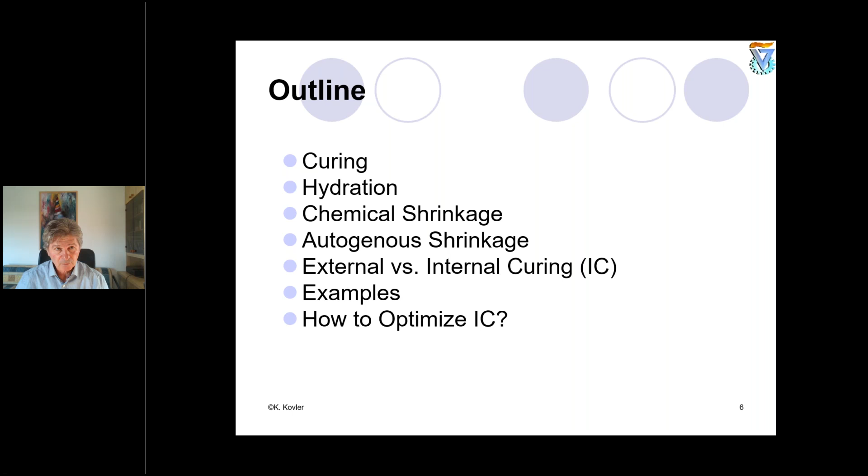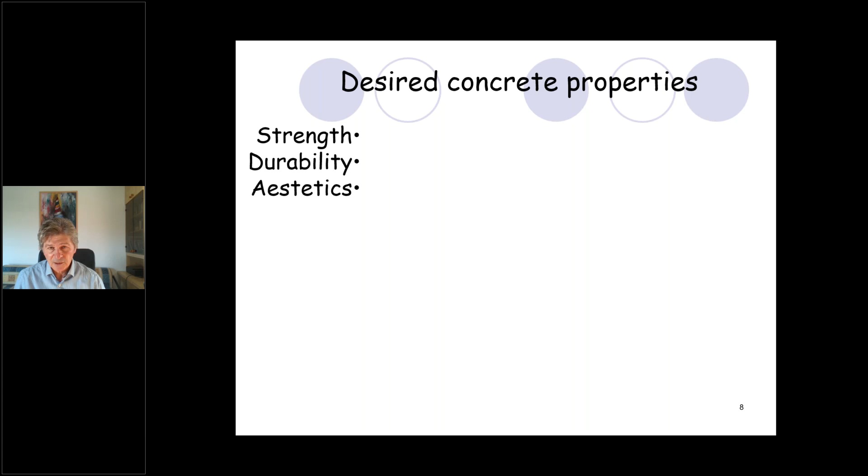What are they? We are speaking about strength, durability, and beauty, aesthetics. You see, this is a kind of strength, durability, and finally beauty, aesthetics. So concrete structures, especially if they are exposed, not plastered, not coated, should look nice.

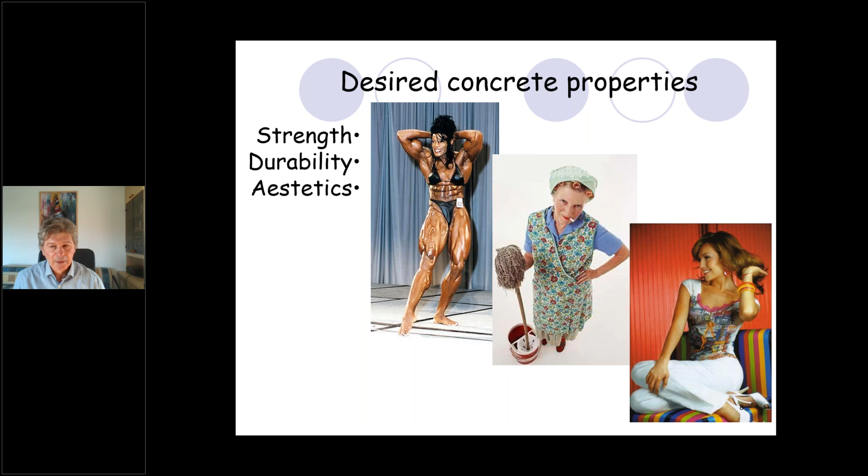In Israel, in our National Institute of Standards, we have been trying in the last 20 years to adopt as much as possible Eurocode and the European standards. I'm just citing from Eurocode about curing: concrete shall be cured and protected to minimize shrinkage, mainly plastic shrinkage in the very beginning, to ensure adequate surface strength, adequate surface zone durability - again strength, durability - and to protect from harmful weather conditions, from freezing, which is not very relevant I believe for most areas in India, and Israel is also considered a hot country.

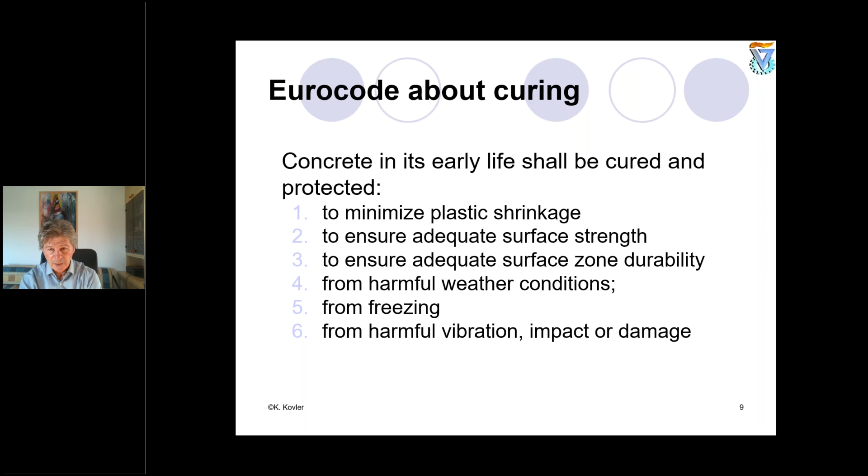But in principle, we build concrete structures in many countries with half a year or maybe even more of winter. So there is a need to protect from freezing, from harmful vibration, impact, or any other damage.

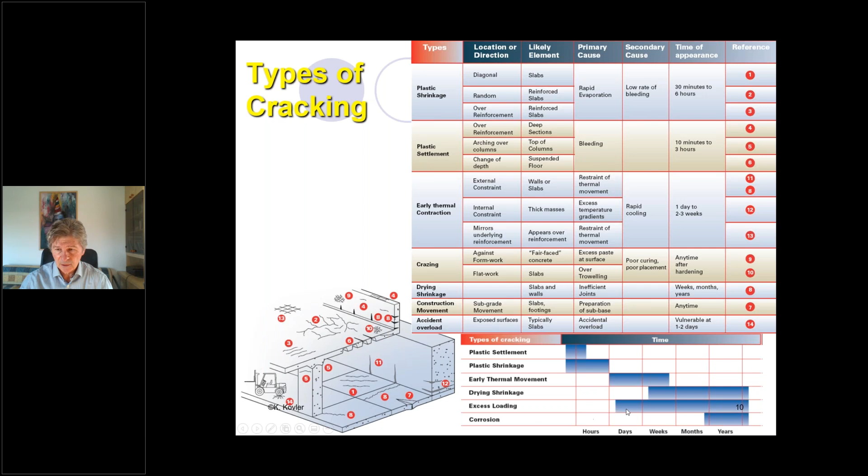Excess loading and corrosion. There is a need to plan and execute curing. It's not something easy to do. We need to understand there are different standards, make some calculations, and design properly. So this is a real science in our area.

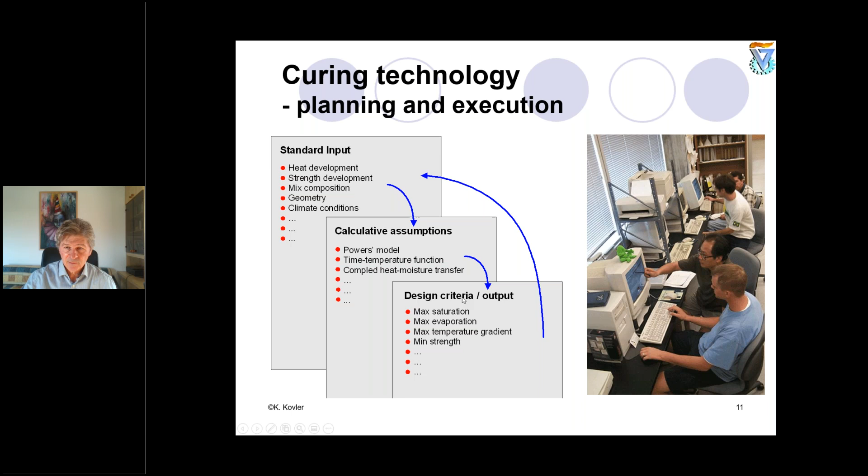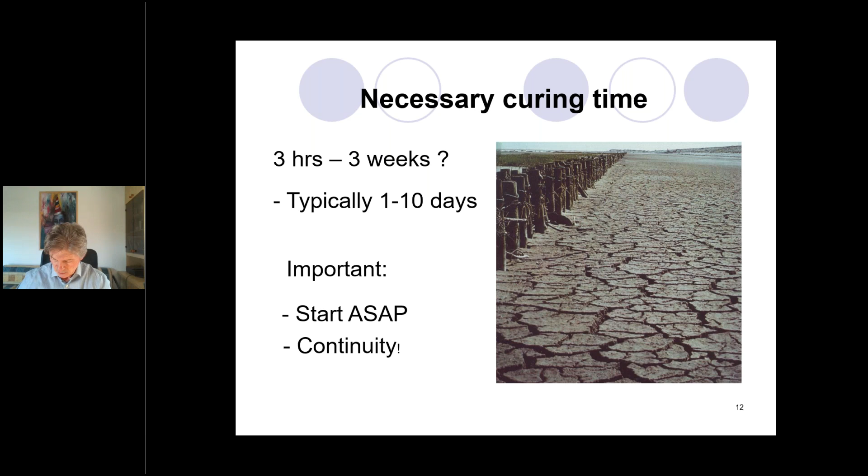Let's start speaking about the details. What is the necessary curing time? Usually we are speaking about hours, days, and weeks. The answer in our standards is simple: typically the standards discuss 1 to 10 days curing time. And what is very important to emphasize is we need to start curing as soon as possible. Another very important word is continuous curing - trying not to have any breaks, any pauses in curing, continuously curing.

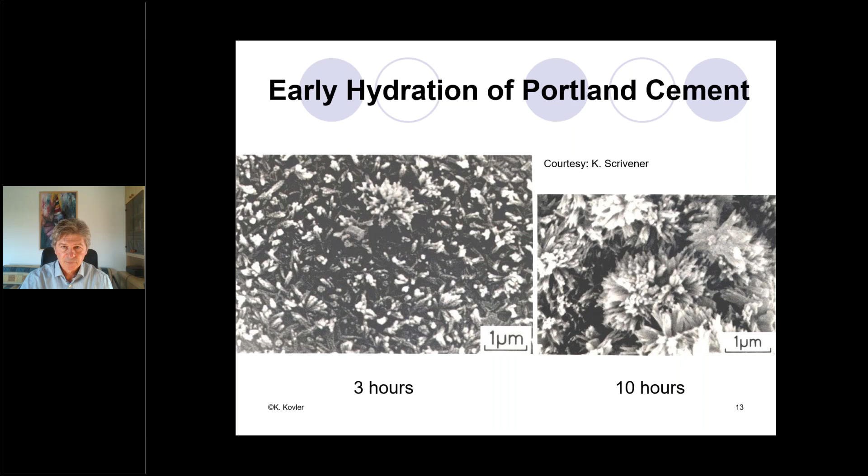Very often they are noted as CSH, calcium silicate hydrates. This calcium silicate hydrate phase is the decisive phase for strength. It's a strength-bearing phase, but it doesn't form very early, so it needs some time.

The first period is called the dormant period, when nothing has happened. This is because of the need to regulate the setting times to provide a possibility to work with fresh concrete - transportation, casting, vibrating, finishing, all kinds of technological operations with very fresh concrete. Strength starts growing a few hours after the so-called setting time. I don't want to go into details now - we have different setting times, initial set and final set, but in principle we are speaking about hours and then days.

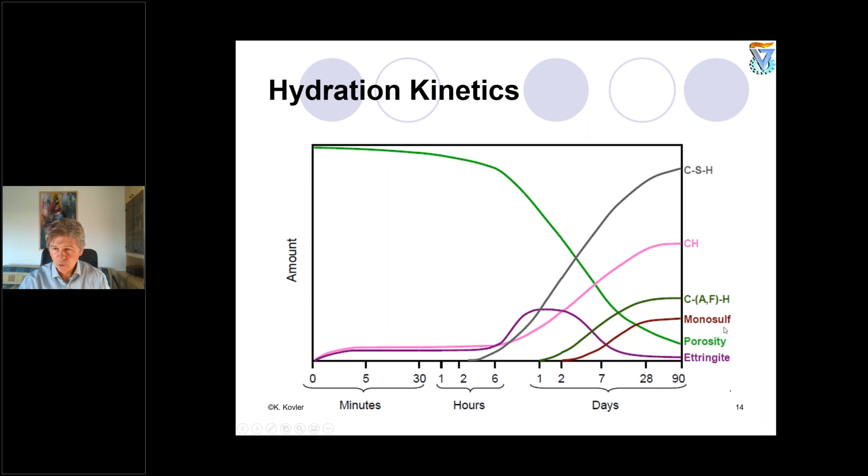Different phases are formed in parallel to the main strength-bearing phase CSH: calcium hydroxide, which is responsible for alkalinity, which is a nice thing from the point of view of protecting the steel reinforcement from corrosion. We have other phases too - monosulfate, ettringite, and many others.

Heat of hydration can be effectively used to map the progress of hydration. We distinguish between five phases: initial dissolution of solids, induction period, acceleration, deceleration, and steady state. This is illustrated in the next slide.

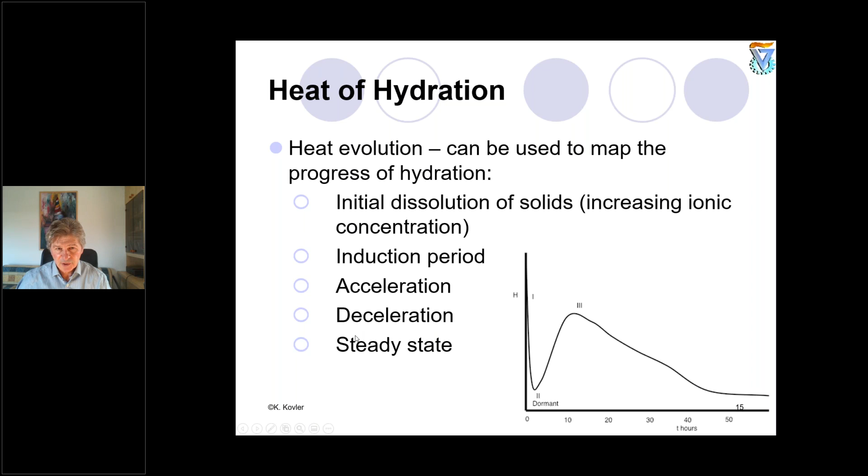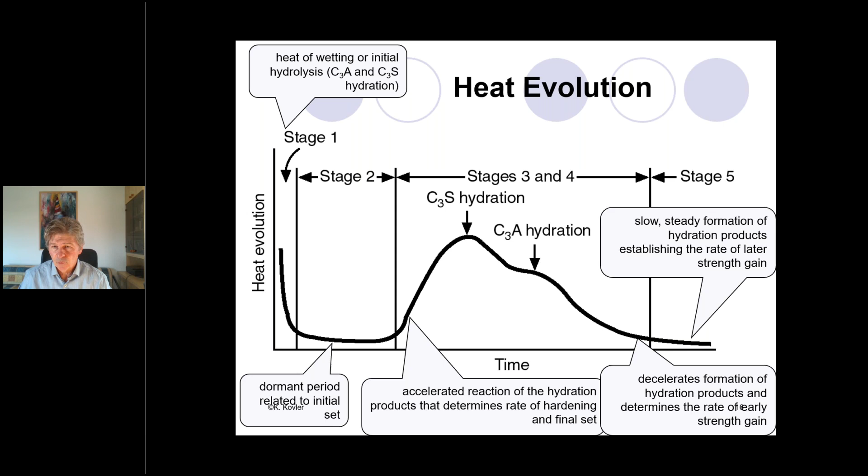In the beginning, stage 1, we have a little bit higher heat than in the following stages, because of dissolution or initial hydrolysis. Then stage 2 is a dormant period related to initial set. Stages 3 and 4 indicate the C3S, meaning alite hydration, the main mineral usually in Portland cement, and C3A also. Deceleration is when formation of hydration products is decelerating, and this phase determines the rate of early strength gain. Then slowly the hydration products are formed and the strength increases.

Different minerals: alite, C3S, belite, C2S, tetracalcium aluminoferrite, which is celite or ferrite, and the only mineral which doesn't have an abbreviated name, C3A, tricalcium aluminate. All of them have different kinetics of hydration.

When we speak about hydration, we understand that cement hydration, like hydration of many other mineral binders, also gypsum and lime-based systems, is exothermic with liberation of heat. Concrete is an insulator, and heat of hydration can be either detrimental, for example when we have thermal gradients, especially important for mass concrete structures, resulting in cracking, but also helpful, especially in winter time, in cold regions, which provides activation energy when concrete is in cold weather, resulting in early strength.

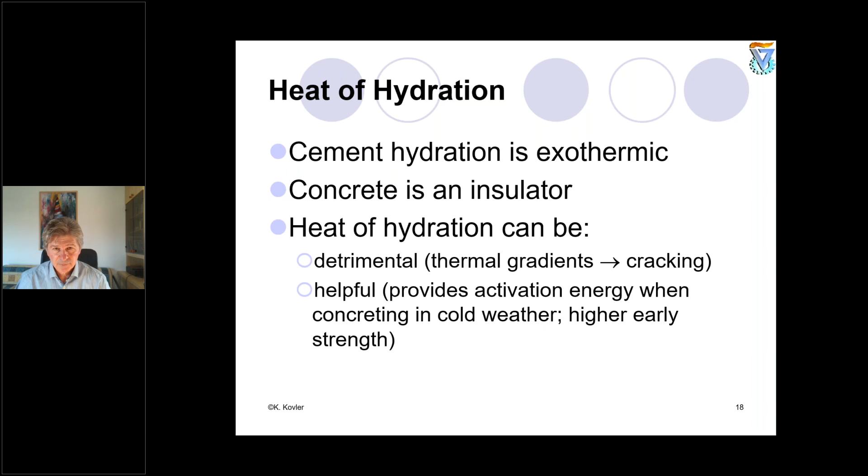You can see this diagram, I took it from one of the teaching books, I think it was Mindess and Young. You can see there is a kind of optimum, and the optimum temperature is between 10 and 20 degrees. I know that in India you have in many places higher than 20 degrees, but it's okay up to 30, just not very, very high.

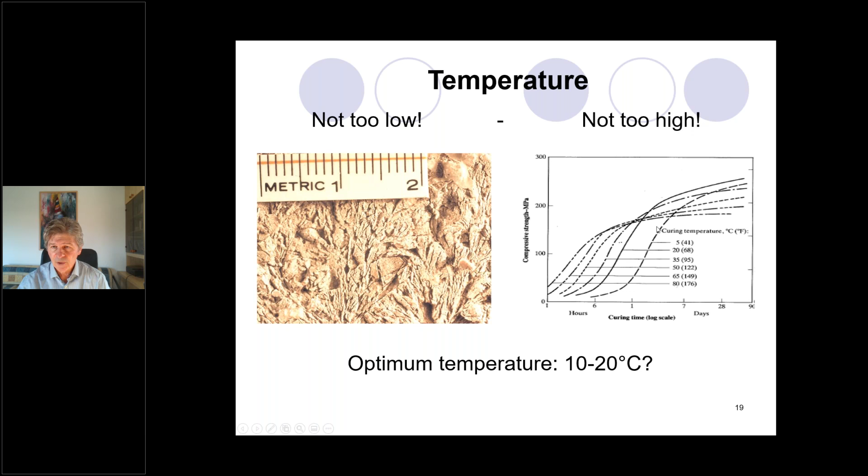I would like to remind you of the popular concept of maturity. We have different formulas illustrating maturity. The most popular, I think, in the literature, teaching books, and standards, is this formula where temperature is corrected by 10 degrees centigrade, but this is a kind of empirical correction.

This is a curve which is very familiar for all concrete technologists, illustrating the dependence of strength versus maturity. It doesn't matter what kind of temperature was implemented during curing, all the points lie on the same curve, which is very useful to predict, for example, when we need to demould structures, or when we can release the stresses from the reinforcement or cables, for example in pre-stressed concrete. So there is a very important meaning of this maturity curve.

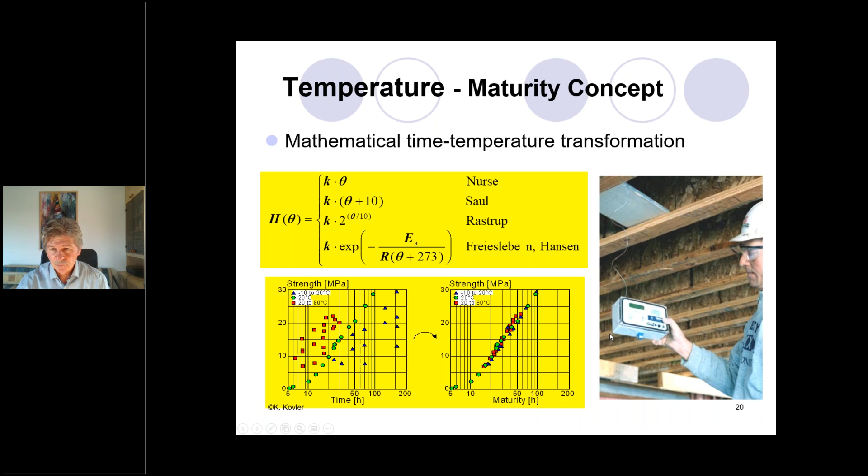Different companies, I don't want to advertise for any specific company, but many companies produce this kind of instrument indicating the maturity immediately. Most of my presentation is now devoted to moisture.

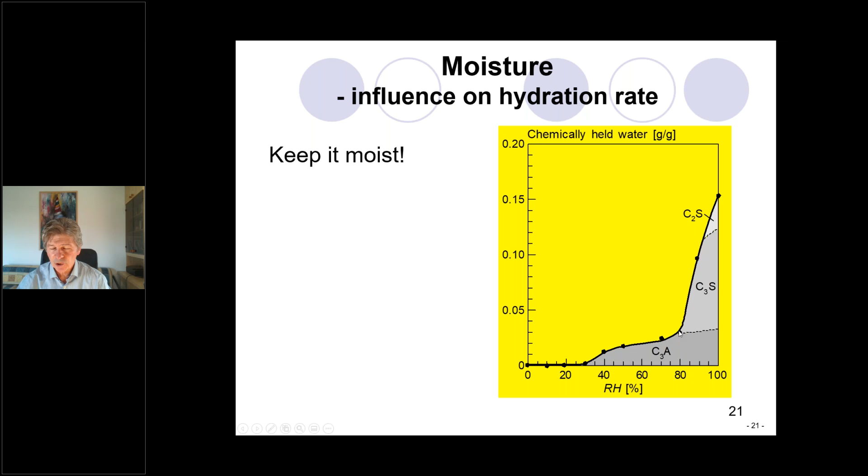We know well that we need to keep concrete moist. Keep it moist, this is a rule. The different phases I spoke about before, C3A, C3S mainly, and C2S, need sufficiently high relative humidity to hydrate. In very dry climates, in very low relative humidity ranges, we can neglect the formation of the hydrates because there is no chemically held water, nothing.

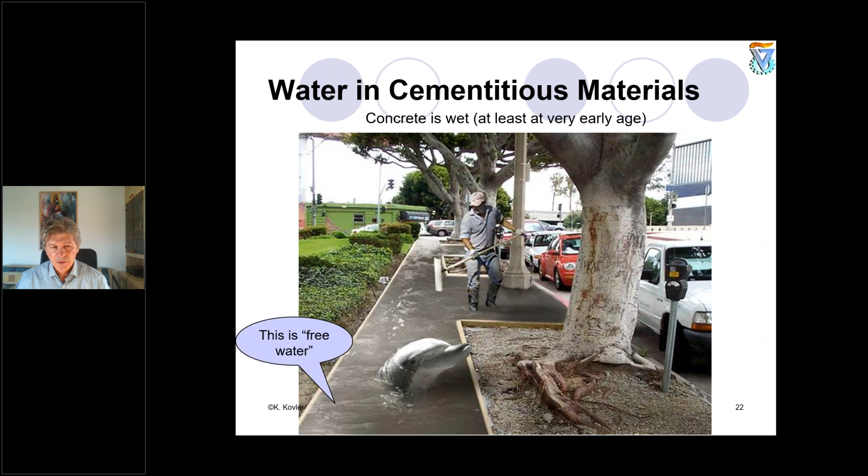Water is a very important component, as we all know, in concrete structures and compositions. Of course, concrete is wet, at least at very early time, so we have extra water. In many cases, not all this water is needed for hydration, so we have too much water, and this water will eventually evaporate. This is so-called free water. Free water, just to remind you, is mixing water that has not reacted with the cement phases. It's not a part of the structure, not a part of these phases.

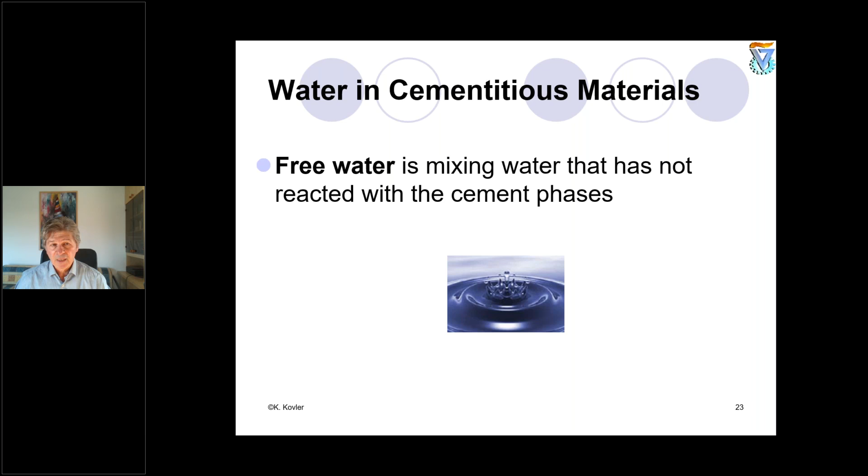In addition to free water, often called capillary water, located in capillary pores, we have physically adsorbed water. I'm just following the model of Sereda: physically adsorbed water and interlayer water. So we have different kinds of water: free water and physically adsorbed water, including interlayer water.

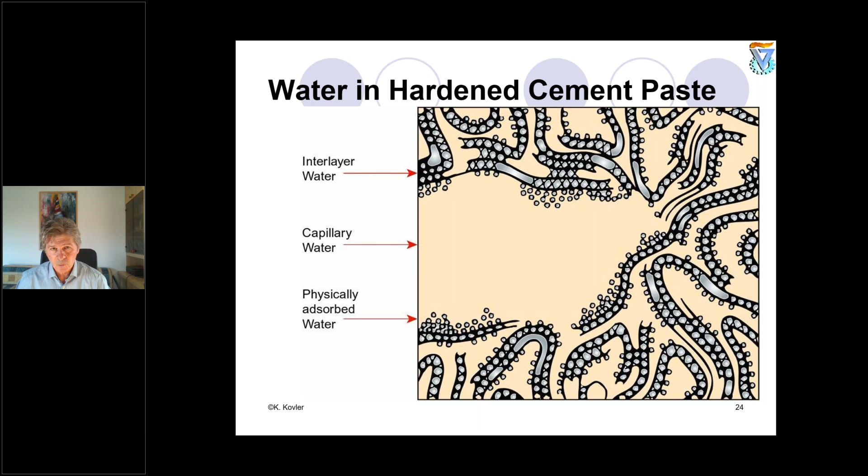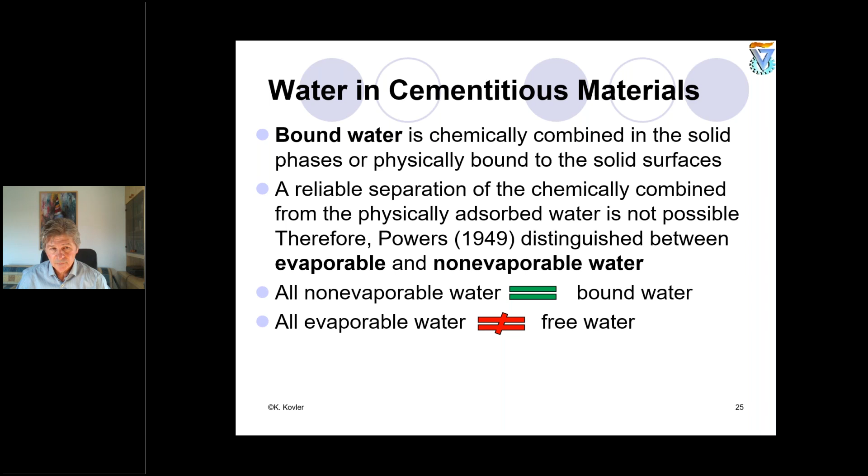Bound water, or chemically bound water, is chemically combined in the solid or physically bound to the solid surfaces. A reliable separation of chemically combined from physically adsorbed water is not possible, unfortunately. Therefore, Powers in '49 distinguished between evaporable and non-evaporable water. All non-evaporable water is considered bound water, and all evaporable water is not necessarily free water. This is just reminding you of the basics from the classic work of Powers.

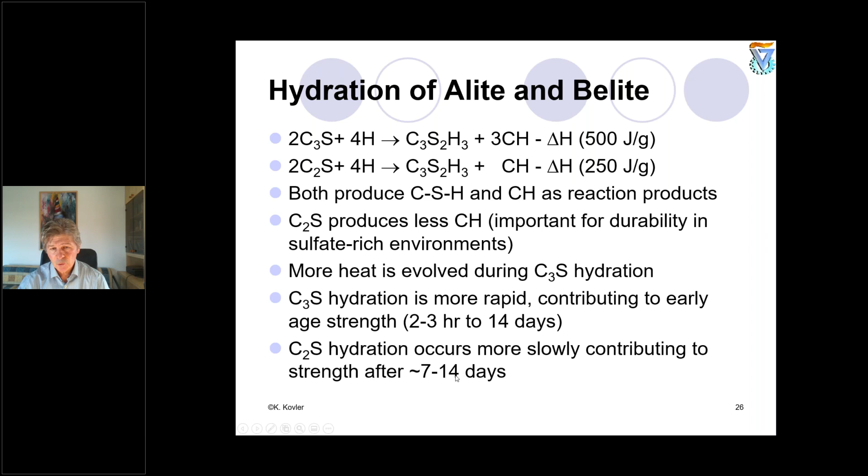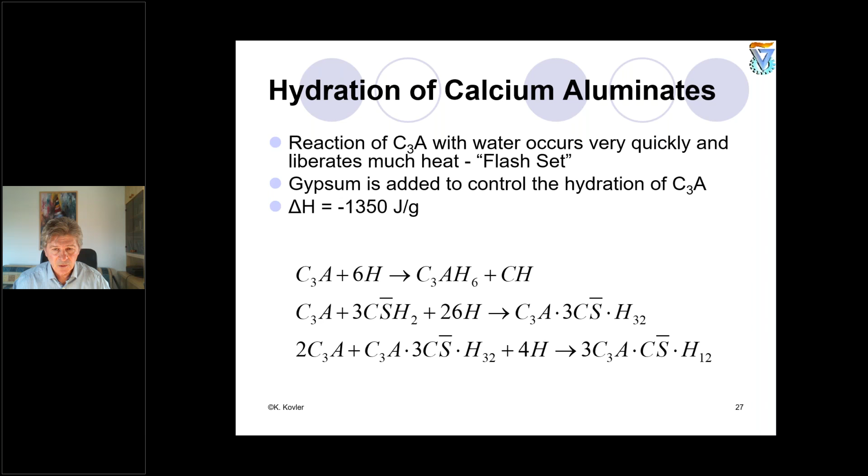Non-evaporable water, if we calculate it using stoichiometric calculations, is different for different hydrates. But in principle, coming to the weighted average of the non-evaporable or combined water content, we're speaking about a water-to-cement ratio of just 0.23, 0.24 for this bound water. This is the part of water relative to cement needed to form hydrates. But unfortunately, or maybe fortunately - we'll discuss it later - this very low water-cement ratio is not enough to make complete hydration of Portland cement.

We need to take care of the physics of porosity, because if there is no room to accommodate the expansion of the newly hydrated products like CSH, the reaction will stop. For having the total minimum water-cement ratio needed to complete the reaction of Portland cement with water, we are coming to approximately 0.4, which is much higher than the chemically bound water-to-cement ratio.

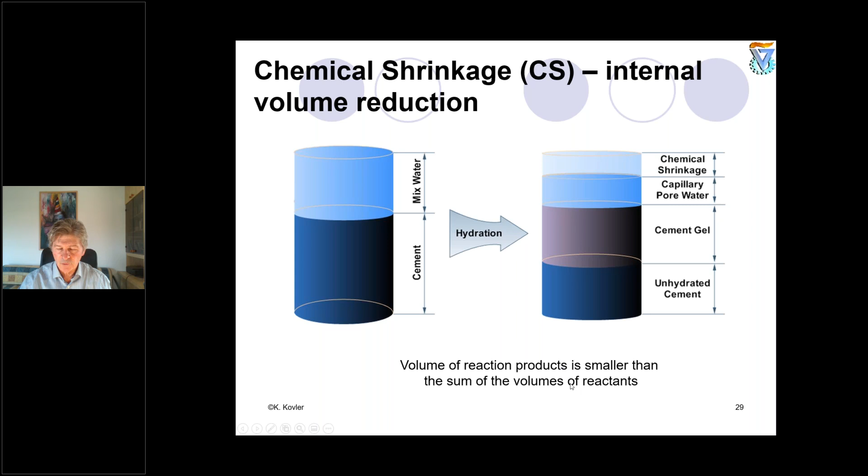The magnitude of this chemical shrinkage is relatively high. By Powers, in different works, we can read different numbers, but he spoke about 6, 7, 8%. So this is not per mil, not microstrains, which is used by structural engineers to design structures - it's several orders of magnitude higher. The volume of reaction products is known to be smaller than the sum of the volumes of reactants, and this is our chemical shrinkage.

The first researcher and engineer, by the way he was in parallel a brilliant researcher and brilliant engineer, was Louis Le Chatelier, a French-Italian chemist. He came from a mixed family. Maybe the mixture of genes is responsible for the brilliant contribution of Louis Le Chatelier into different areas of cement and concrete science and engineering.

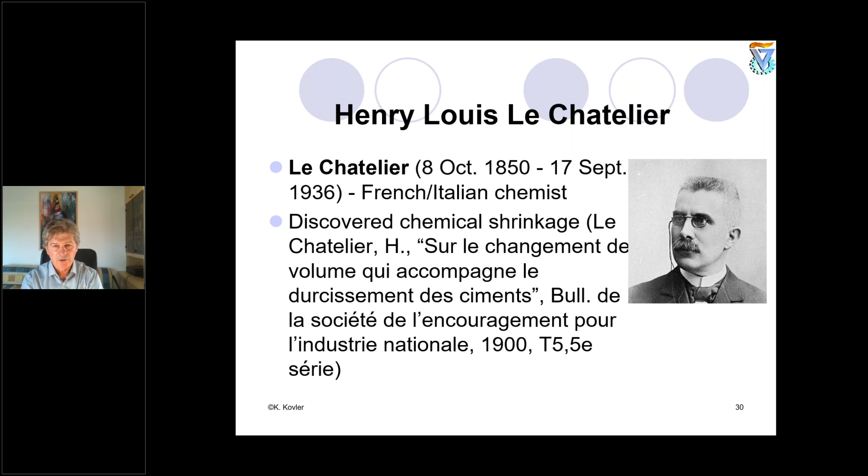He discovered this chemical shrinkage more than 120 years ago. In 1900, he published a famous work explaining what chemical shrinkage is.

What is the practical importance of chemical shrinkage? In concrete with very low water cement ratio, I'm speaking about high strength, high performance concrete, chemical shrinkage results in self-desiccation and autogenous shrinkage, which can lead to cracking and even failure.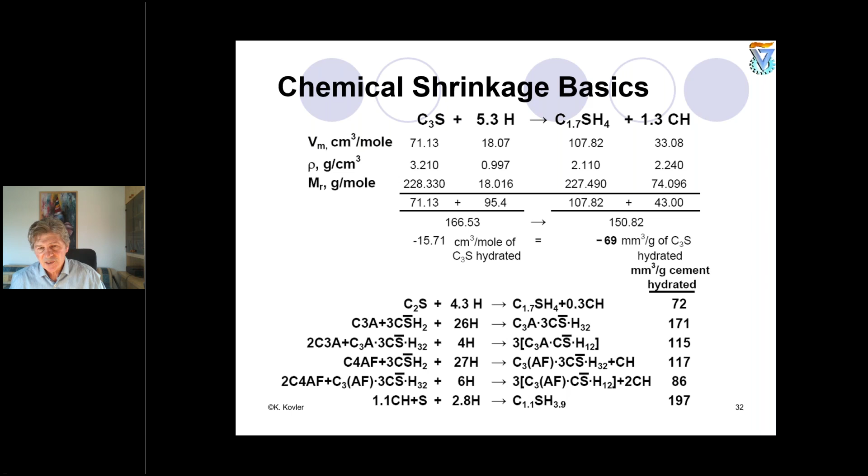I would like to explain briefly how Le Chatelier measured this chemical shrinkage in his experiments, and how we can measure it now. This is a very simple test he did. He took a flask, cast a very thin layer of cement paste in the bottom, filled it with water, and followed the drop of the meniscus in this very thin tube.

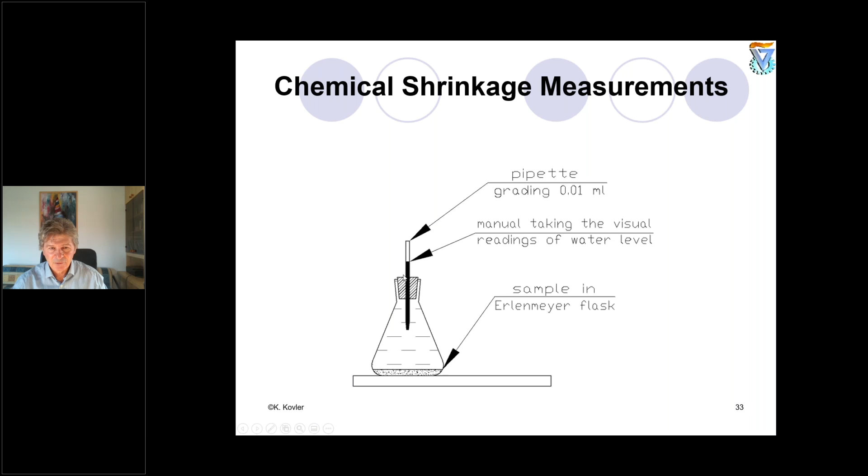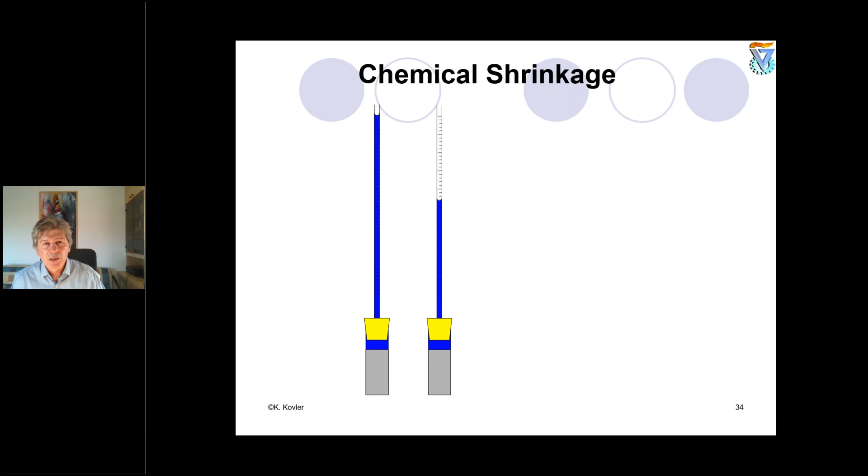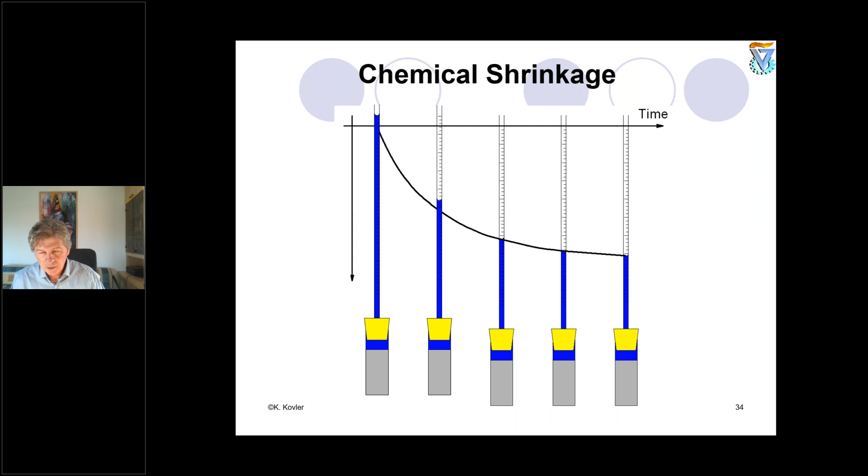From following the meniscus drop, he understood that some water was disappearing. It didn't evaporate, because these conditions were not characteristic for evaporation. So where did the water go? He understood the water filled the internal pores forming in the system. So chemical shrinkage is a reduction of volume, an internal volume reduction. It is very difficult to see it from outside.

So we have another method of measuring chemical shrinkage, by weighing this flask with the sample inside water. This is a very simple test. We can do it with a very accurate balance, with accuracy of at least 1,000th of a gram. It would be nicer to have more accuracy, to have high accuracy.

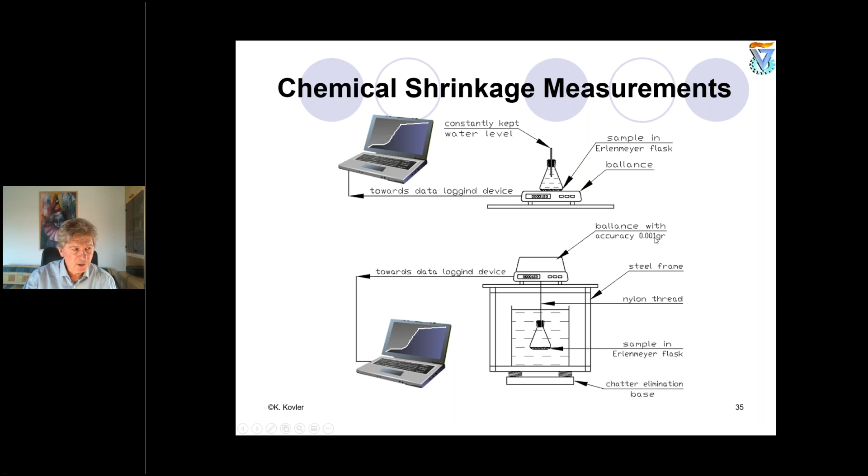This chemical shrinkage is accompanied by autogenous shrinkage and self-desiccation. Self-desiccation is a direct result of chemical shrinkage. This diagram was taken from one of the works of Professor Jensen from Denmark. You can see addition of silica fume increases the self-desiccation, and relative humidity in the system is dropping.

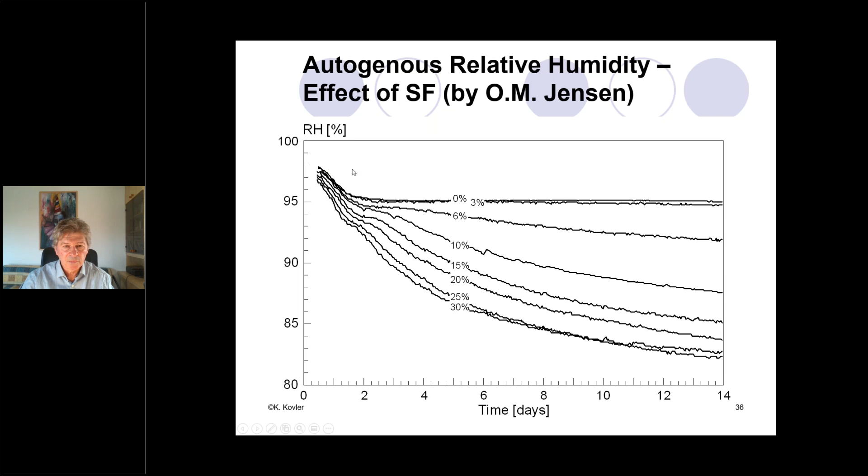What is the difference between chemical and autogenous shrinkage? I would like to say a few words about the difference. So again, chemical shrinkage is inside the system - you can see these newly formed pores shown in white. Autogenous shrinkage is a shrinkage which can be registered from outside. Of course, the magnitudes are completely different.

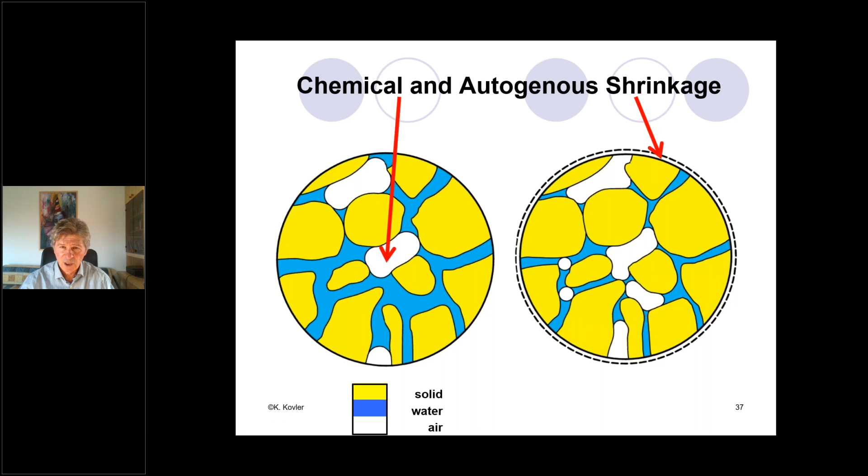You will see later on the typical results of measuring autogenous shrinkage. Then, how do we measure this volume reduction? This volume reduction is measured by using a so-called condom test.

Yes, this is a very popular test in the labs. We have to fill this condom with cement paste, for example. Or, by the way, there are big condoms - I'm serious, which are used for horses, for example. Yes, I saw these condoms in the labs for measuring volume changes in concrete or mortar specimens.

So this specimen, located in the membrane which is a condom, is immersed in water. By the way, instead of water, we recommend using a more viscous liquid like oil or paraffin oil, which is less penetrating.

Now a few words about different components of shrinkage. So till now, I spoke about autogenous shrinkage, which is a result of chemical shrinkage, but all these shrinkage components are measured from outside - this is external volume or linear reduction. Autogenous shrinkage is a very important component, mainly in high strength concrete, HSC.

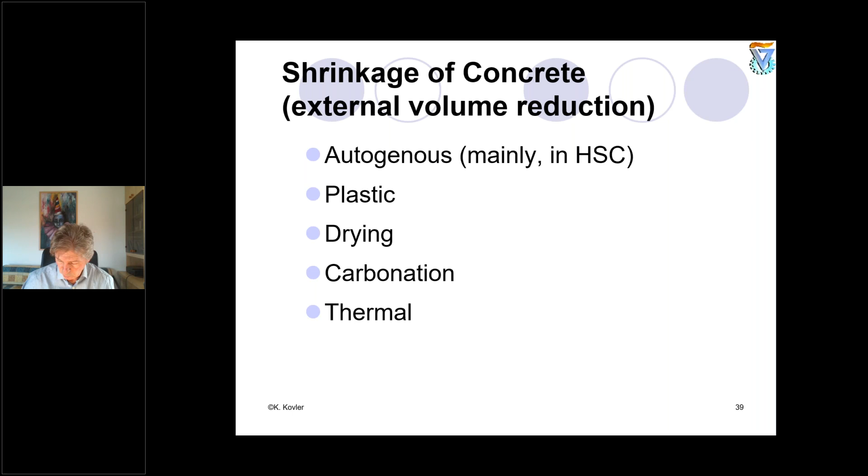Of course, we know well what plastic shrinkage is, what drying shrinkage is, what carbonation shrinkage is, observed in the very external layer of concrete, and thermal shrinkage, because most construction materials have different coefficients of thermal expansion. We cannot avoid thermal fluctuations in the ambient air, and concrete, by the way, during hydration can change temperature. So we have different temperatures - ambient air and concrete temperature - and we need to take care about these thermal components as well.

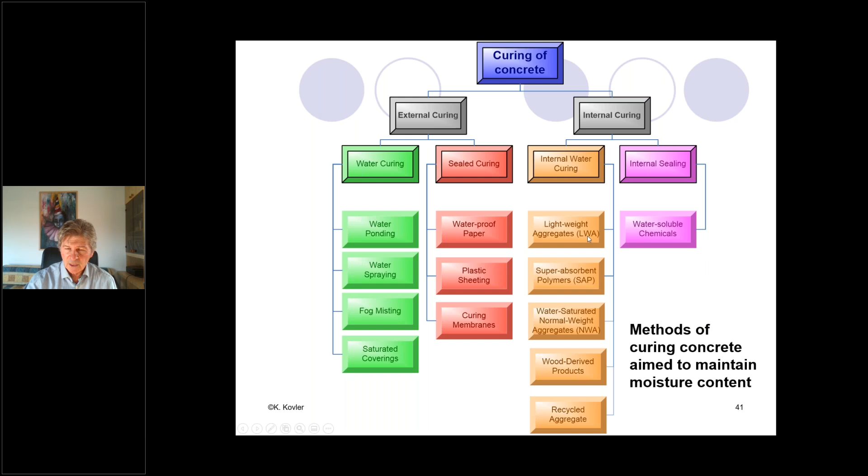Internal sealing methods are still on the research laboratory shelves. We have this method described in several papers, but it's still far away from being implemented in the industry. But these methods, especially lightweight aggregates and superabsorbent polymers—especially the first one—are already in practice.

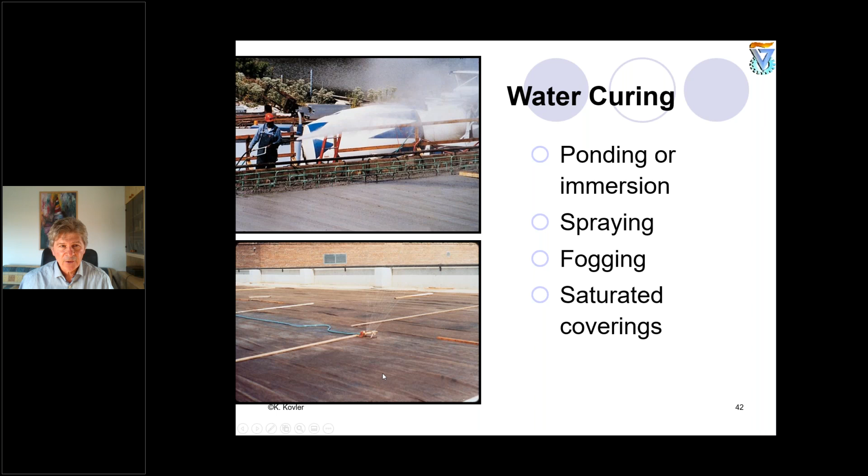Water curing, just to remind you: ponding, spraying, fogging, saturated coverings. All these technologies are conventional. They are very famous, very popular in the concrete industry. I'm going quickly because I have a large number of slides to go over.

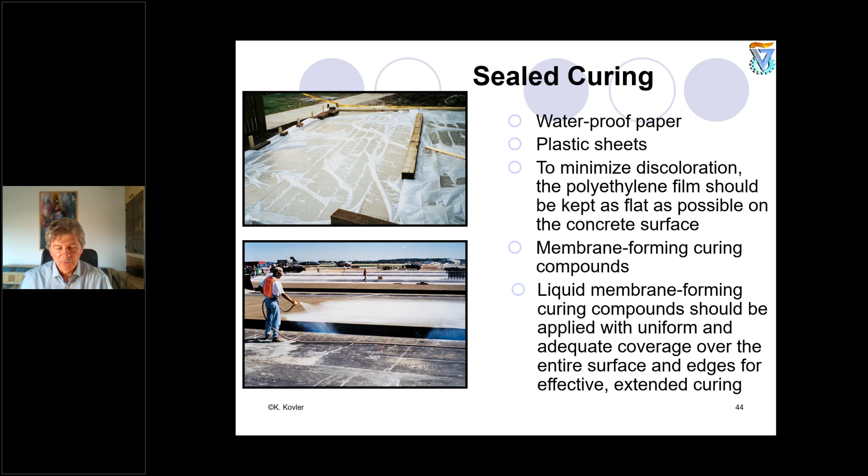Seal curing, this is just an illustration of different systems: waterproof paper, plastic sheeting, for example polyethylene sheets, and membrane forming curing compounds, which can be sprayed from outside. These prevent evaporation of concrete, all these methods. Of course, workers should be protected by special masks because some curing compounds are toxic, and we need to take care.

Now I'm coming to high strength or high performance concrete. First thing to mention would be minimum bleeding in high performance or high strength concrete.

Minimum bleeding is very important to compensate evaporation of water when we speak about plastic shrinkage and plastic cracking. This shrinkage is extremely important for very hot climate, and not only for hot climate—it can happen easily in very cold climate when the wind speed is high. For example, in Norwegian fjords we have extremely high wind speed.

The evaporation rate is a direct function of the wind speed, of the temperature—not only from the ambient air, but also depending on the internal temperature of concrete—and relative humidity of the air. All these four components are extremely important, and this evaporation can be nicely compensated by bleeding.

So in this sense, bleeding can sometimes be very positive, in spite of the fact that most builders, researchers and engineers consider bleeding as something hazardous. But for example, for concrete pavements, when we have a high surface of evaporation, it can be nicely utilized.

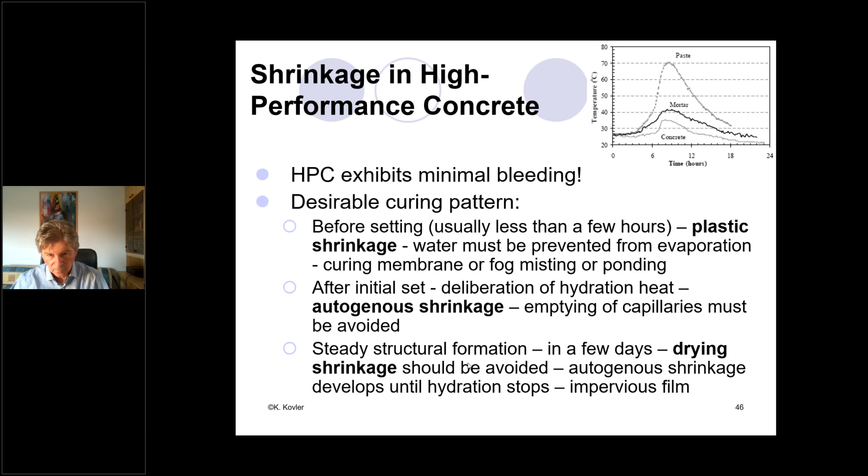So again, moisture, external methods for maintenance—but why not external curing for high strength concrete? First of all, external or conventional methods of curing require extra labor.

We need to take care about quality assurance, quality control and assurance. Assurance, by the way, is more important than control. We have, in many cases, inaccessible surfaces.

Especially when discussing high strength or high performance concrete made with very low water cement ratio, this concrete is low permeable. It means water applied from above, from outside, cannot penetrate too deep—more than 2-3 millimeters. You can neglect this penetration depth, so it doesn't help to cure.

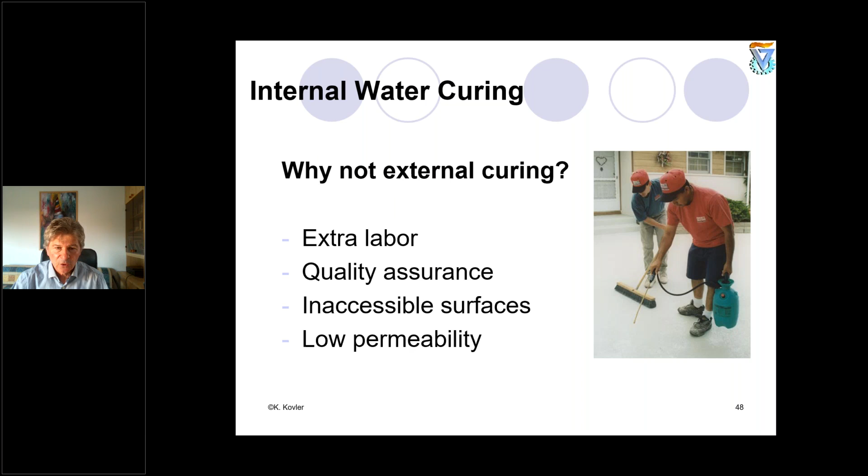And then all the idea of internal curing is introducing, how to explain it, a kind of Trojan horse—something which is acting from inside. This material, additive or mixture can be called an internal curing agent.

It should be porous because it should accommodate and contain some water. But please look, this water is not a part of the mixing water. It should be liberated slowly during the hydration process, but not immediately, not immediately.

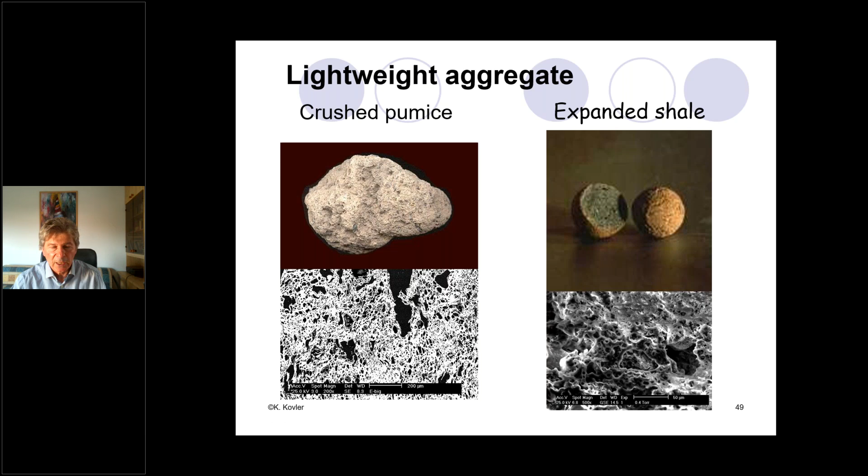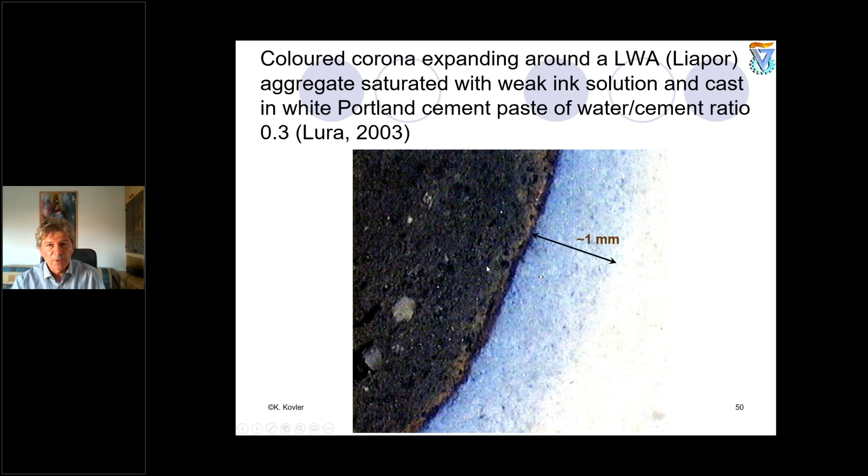Lura in 2003 tried to measure how deep, how far this accumulated water, located inside the particles of the porous aggregate, can penetrate outwards. So he used ink solution, and measured, for example, 1 millimeter is quite something. But for me it's not a very accurate experiment, because we don't know exactly what the kinetics were, when this water was liberated from the particles. But for sure it can liberate and penetrate quite far - we are speaking about millimeters.

This is an electron micrograph of the typical structure of pumice. We worked a lot with pumice. In the beginning of the 2000s, I tried to introduce pumice as a good combination of mechanically strong aggregate which does not disintegrate during mixing. Otherwise, if you use something very porous but very weak mechanically - for example perlite - this aggregate can disintegrate during mixing, and as a result we have a dramatic increase of slump. So the workability, plasticity, and flowability change dramatically. This is a direct result of premature liberation of water, and this is not good for us. We need to lock this water for a few hours, not to be considered as part of the mixing water.

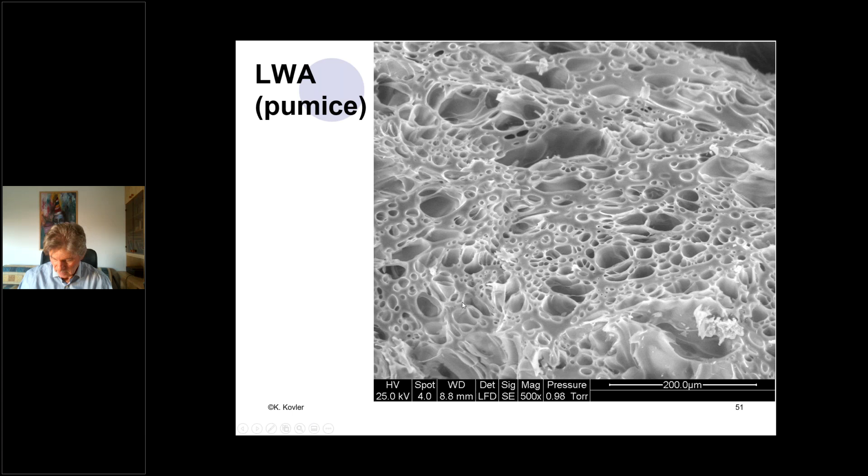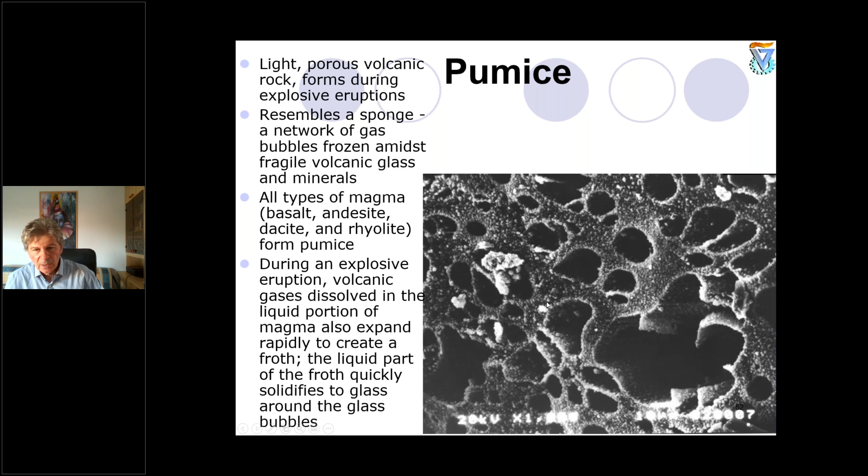What is interesting is that this pumice particle is formed from magma erupted from volcanic origin material, and then the hot gases penetrating through this volcanic material leave behind open pores looking like tubes, very long tubes. Most of the porosity - and this is very important to understand for efficient internal curing - is open porosity. We prefer open pores over closed pores.

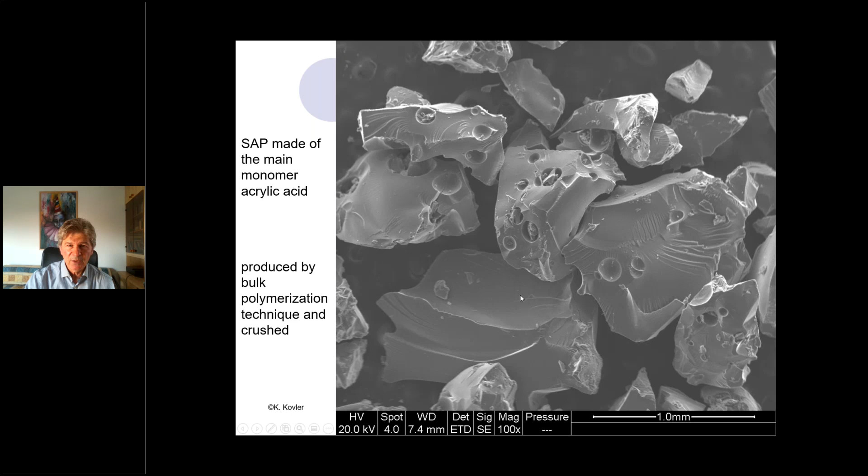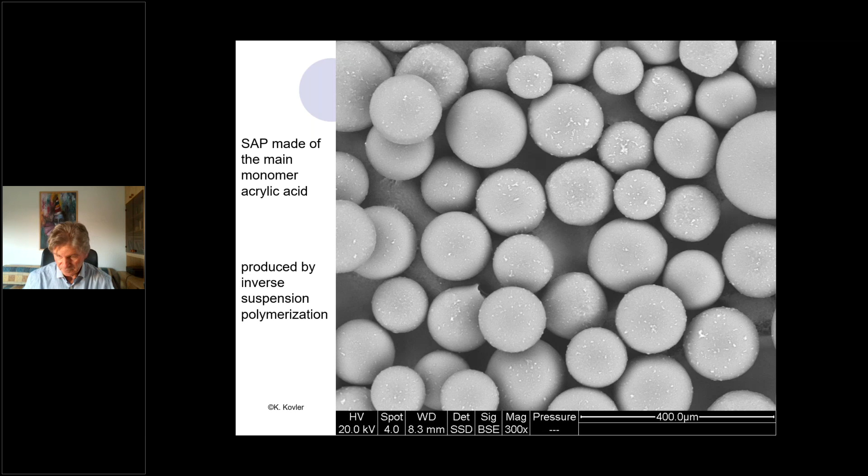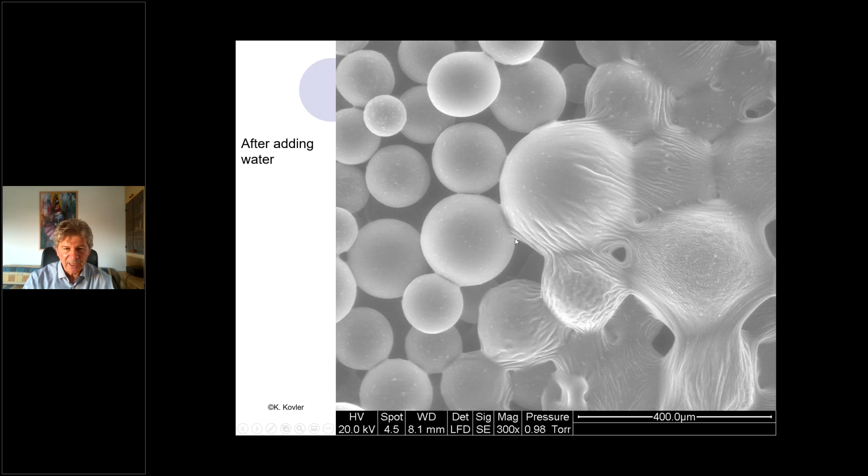And this is, again, returning to the monomer produced by inverse suspension polymerization - spherical particles, before absorbing water. Please look at the particle size: this is 400 microns, so we have approximately 50, maybe 80 microns. This is still not nanoscience, but it is a micro world - microparticles. We took this picture under an environmental scanning electron microscope, which doesn't require any vacuum, and we can see how the absorption of water results in expansion. The particles expand very fast, and this can happen within a very few seconds after mixing with water.

And this should be considered when calculating the chemical shrinkage. When we know this chemical shrinkage, we can automatically calculate how much internal curing agent - whether lightweight aggregate, superabsorbent polymer, or other, for example wood-derived product - is needed to add for eliminating self-desiccation and autogenous shrinkage.

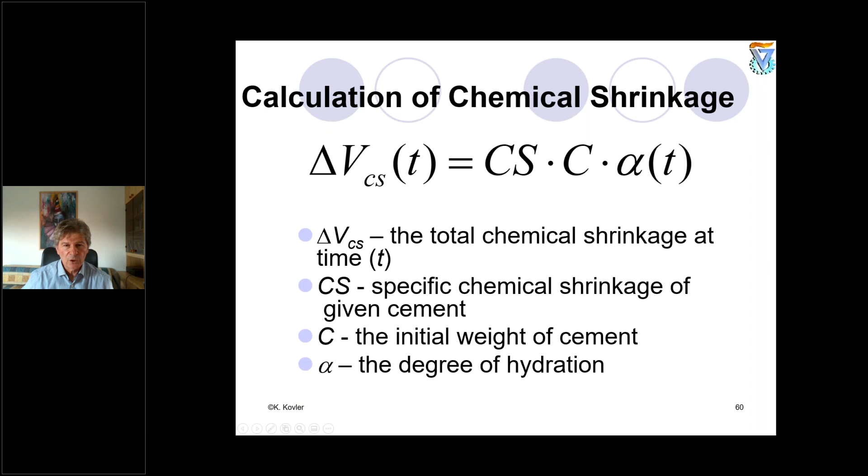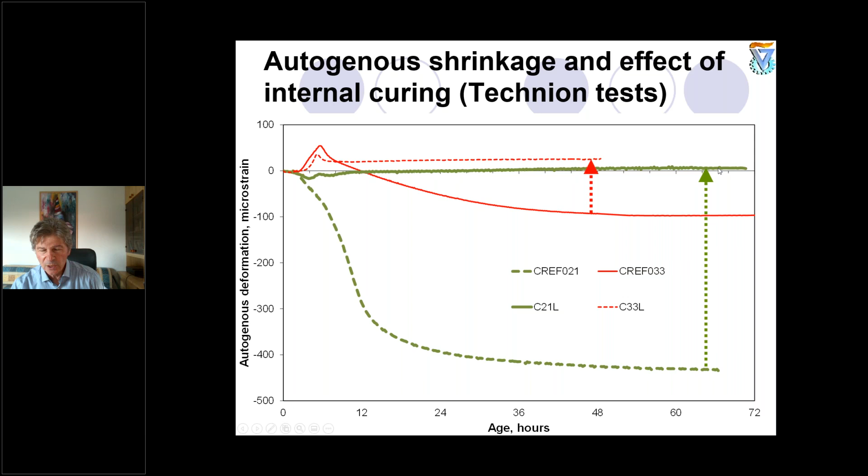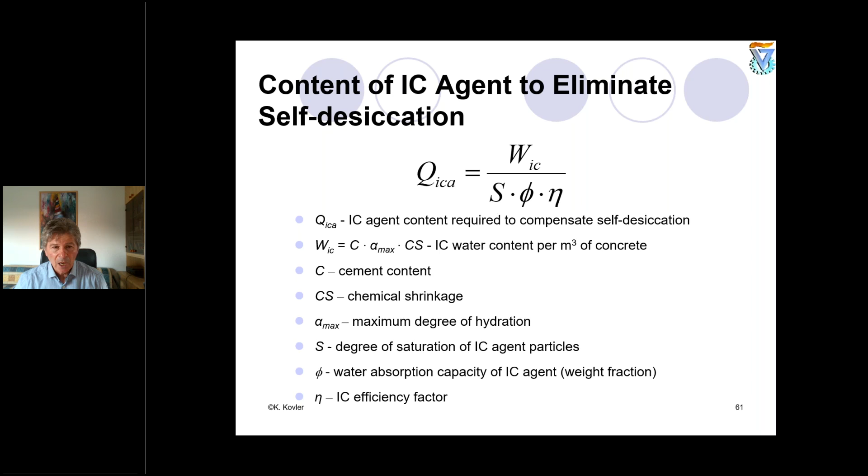If we completely eliminate autogenous shrinkage, the efficiency is considered 100%. If we eliminate 50% of the autogenous shrinkage, the efficiency factor is equal to 50%. So this is very simple to understand, but we know how to introduce this efficiency factor in the formula. And then we have everything to calculate precisely how much of this or that internal curing agent should be added.

But of course, polymers cost money, so in comparison with lightweight aggregates, this technology is more costly. But it depends on the situation in the market, and more superabsorbent polymers are being generated and developed now in the world, and the price per kilogram of superabsorbent polymer has been reduced dramatically during the last 5 years.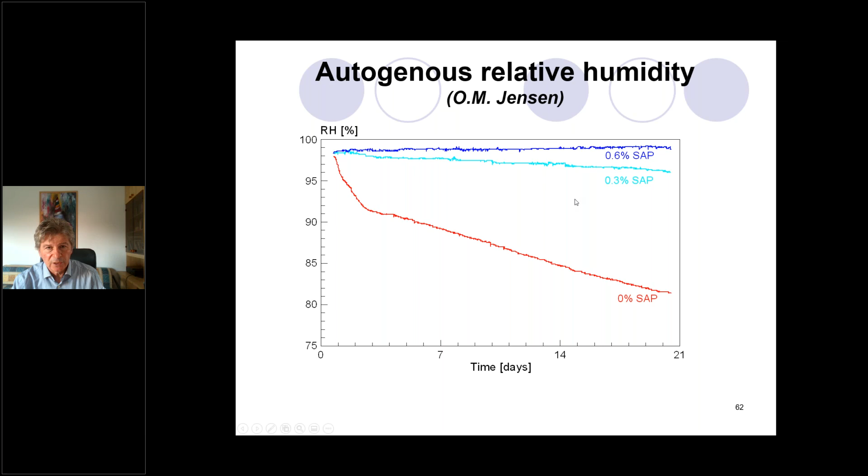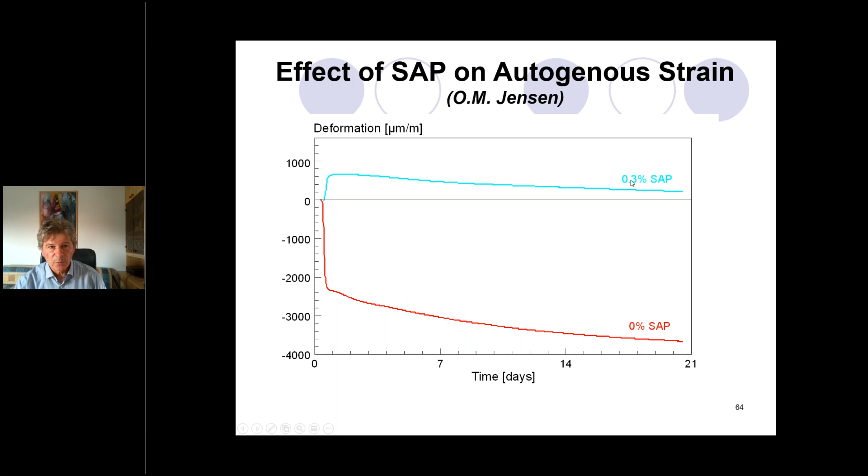Autogenous relative humidity can be measured by this instrument. And this is a result from the same author, Professor Jensen. Again, 0% superabsorbent polymer, this is the deformation. And this is 0.3%, and this is 0.6%. And this is an instrument used to measure autogenous shrinkage.

It's called a dilatometer, which was developed by Jensen and Hansen many years ago in '88. The principle is to be able to measure the deformation from the very beginning, from the very fresh condition, so there is no need to demold the specimen.

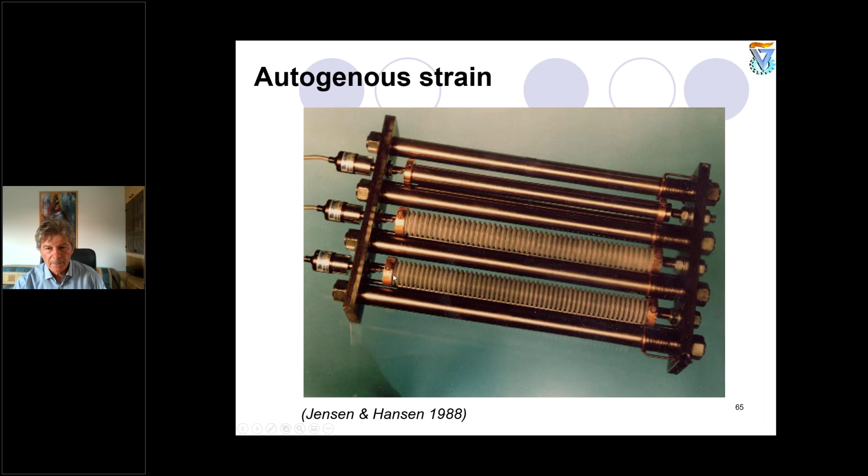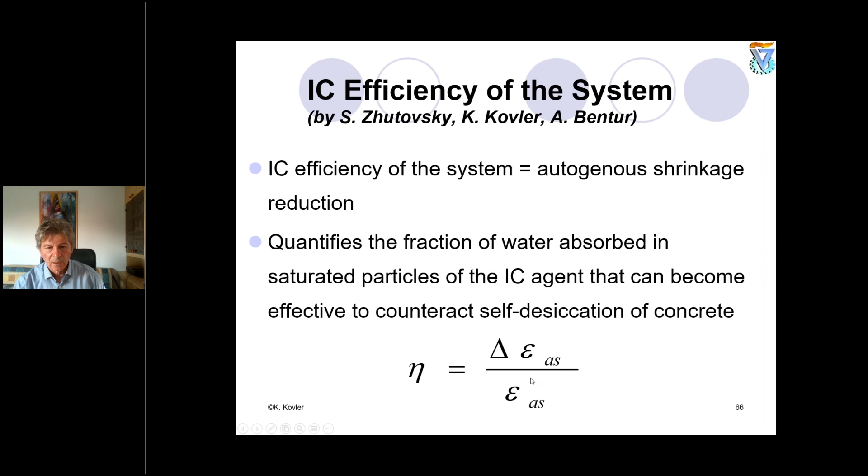And this is the formula illustrating the internal curing efficiency. Again, this is a ratio between the difference in autogenous deformation relative to the deformation in the reference system.

Okay, so I'm coming back, but most of our structures are not restrained completely. We have either partial restraint or fully restrained conditions, and there is no freely loaded structure.

For characterizing the restraint shrinkage of the specimens, the authors developed different kinds of techniques: ring-based tests, plate tests, special tests for repairs, restraint by substrate, and uniaxial tests, for example longitudinal or uniaxial.

This is a very common and very popular test for restraint shrinkage. It's called the restraint ring test. This was done by Grasley and D'Ambrosia, but in principle this ring test is known for years, maybe 70 years, because the first publications are available from the 1950s in Portugal and some other countries. So this is a very important and very simple technique.

We are casting our concrete around the rigid core, which is usually made of steel, a very stiff material. We can say this is stiffer by an infinite number of times more than fresh concrete, so we can neglect the modulus of elasticity of the fresh concrete.

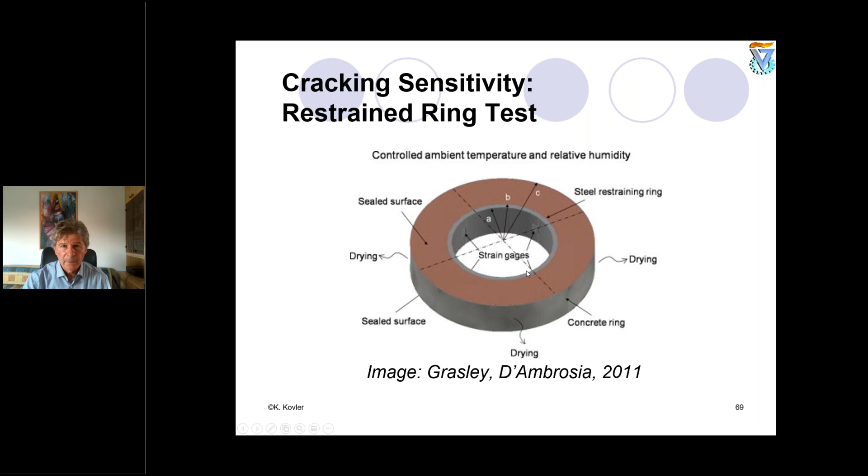We can test both autogenous shrinkage under restraint conditions and drying shrinkage, when we demold the specimen from all sides, above and from the sides, and it shrinks towards the core. This is a picture illustrating the appearance of the concrete ring.

The concrete is located between two rings: the internal ring, which is responsible for generating tensile stresses in the concrete, and the external ring, which can be demolded completely if we want to simulate drying shrinkage. If we don't demold, if we work with sealed concrete specimens, this simulates autogenous shrinkage. Autogenous deformation should be measured under sealed condition and isothermal condition - this is by definition, please look into the report of our technical committee.

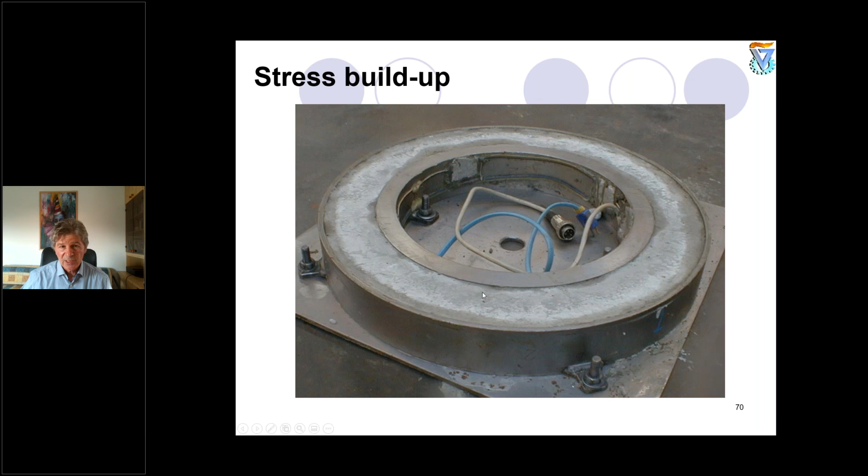By some modeling, we can calculate, we can assume, the stresses generated in the concrete itself in this ring. This is called stress build up in concrete. But again, this ring test is a standardized test - it's part of the ASTM standard.

When we try to introduce some internal curing agent, we have slower build up of the stresses - this is with 0.3% of superabsorbent polymer introduced. Moreover, the lifetime of concrete is extended dramatically - we don't have any cracks within 2 or 3 weeks of monitoring. And if we introduce a little bit more, 0.6% of superabsorbent polymer, we have almost complete compensation of the stresses. Very nice result - no risk of cracking, nothing.

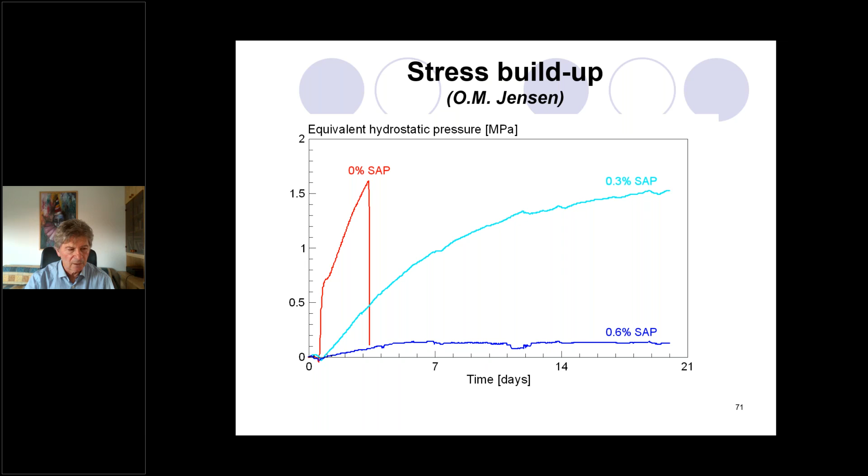This is a very important issue, mainly for high strength concrete, for high performance concrete, which is made with a very low water cement ratio. This concrete, as you may remember, was developed by the Japanese in the 1980s, immediately after they developed the first super plasticizers, and then it was possible to go very, very low in water cement ratio.

But in the beginning, the first 10 years, all the scholars, researchers and engineers were so excited about having this high strength concrete that only 10, 15, 20 years later did they understand that they have a problem of autogenous shrinkage. This is extremely important to understand.

People who are not familiar with concrete technology are often surprised to learn that high strength concrete made of very low water cement ratio can shrink even when cast underwater. Because water from conventional outside curing cannot penetrate easily due to the dense packing, dense microstructure of this concrete. Water cement ratio is a primary factor.

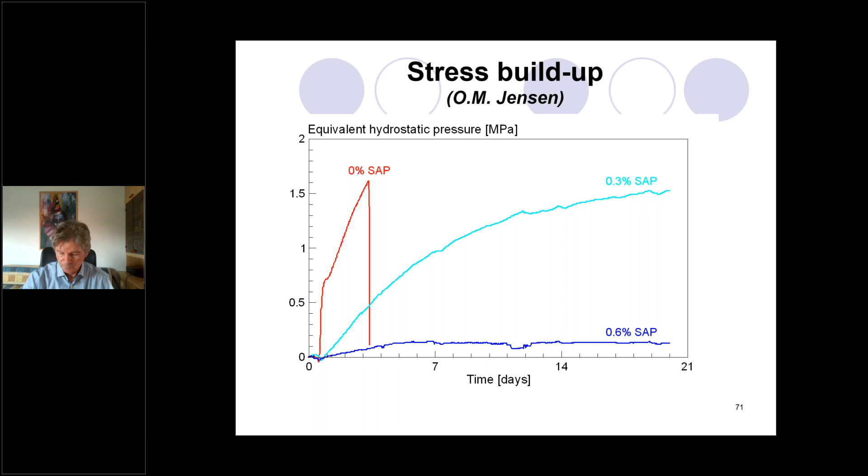So, how to optimize the internal curing technologies? First of all, we need to get maximum efficiency of internal curing to get effective reduction of autogeneous shrinkage.

I remind you of the concept of the eta factor, the efficiency of internal curing.

Of course, we need to remember that we need to provide cheaper solutions. We need to follow the minimum cost. And again, if we speak about superabsorbent polymers, yes, 0.6% relative to cement content is nice, but it's double the amount and polymer costs money. Perhaps in many cases it's enough to be satisfied with 0.3%.

So this is an issue of optimization. We need to make a cost-benefit analysis.

And of course, we need to remember about the strength, because if you introduce any internal curing agent which is porous, it doesn't matter whether it's superabsorbent polymer or lightweight aggregate, we expect a strength reduction, because the porous materials - it depends on the content, the concentration of the porous materials inside concrete. This strength loss should be minimized.

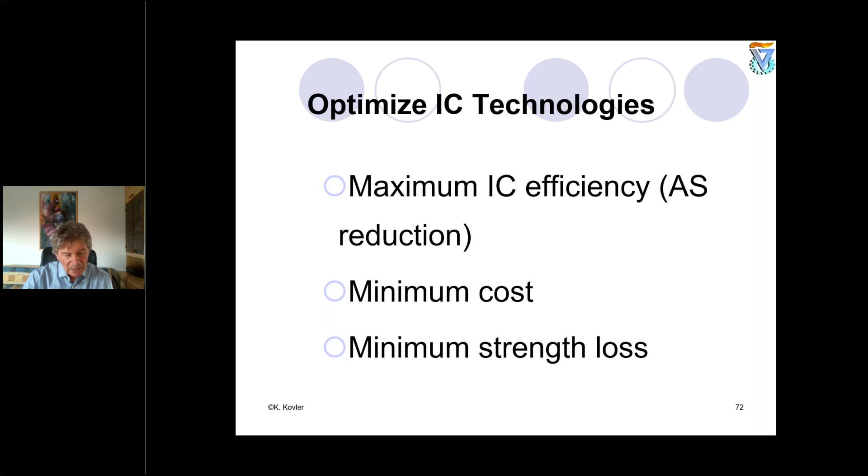But fortunately, we have a trade-off. We have improved hydration rate, we have a higher degree of hydration, we are recruiting more cement for cement hydration. And then, if we calculate precisely the amount of material, taking into account the water absorption and other properties, it can easily compensate for this strength loss.

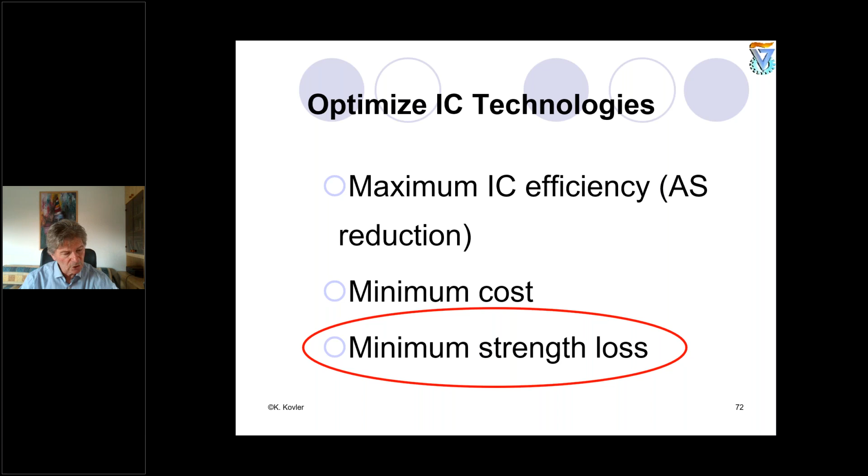So minimum strength loss is a very important topic. In some papers, unfortunately, the scholars, the researchers put too much agent, and it resulted in dramatic strength loss. We don't want to compromise the whole technology of internal curing.

So additional porosity is in trade-off with improved hydration, and we need to understand who wins.

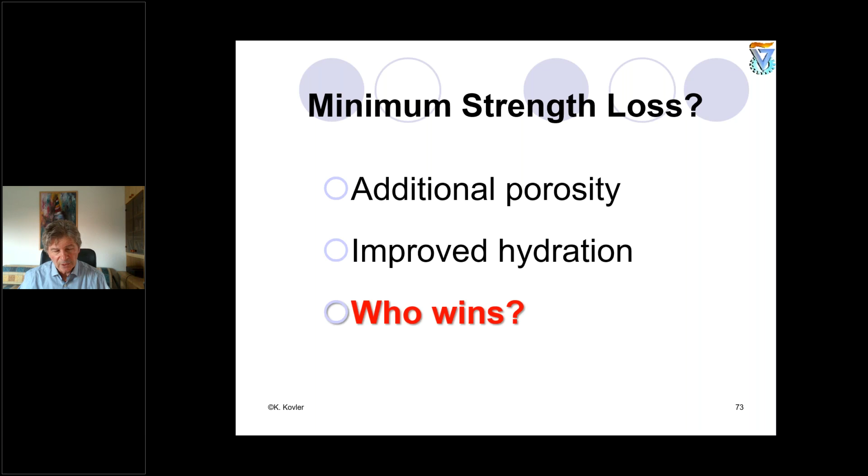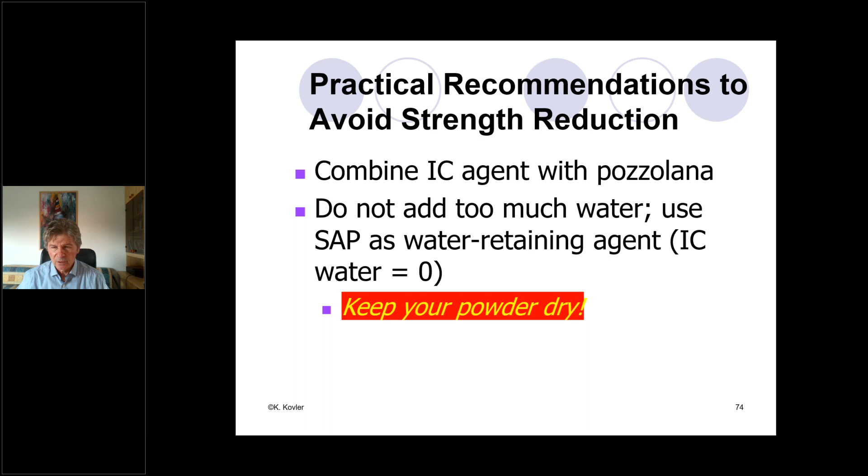Practical recommendations - I am coming to the conclusions to avoid strength reduction. First of all, as we recommended in some of our papers, let's combine this internal curing agent with some pozzolanic materials. Do not add too much water. Use superabsorbent polymer as a water retaining agent and keep your powder dry.

This is extremely important for an internal curing agent like superabsorbent polymer. And do not add too much of this agent - not only from cost considerations, but also from the requirement of minimizing the strength loss.

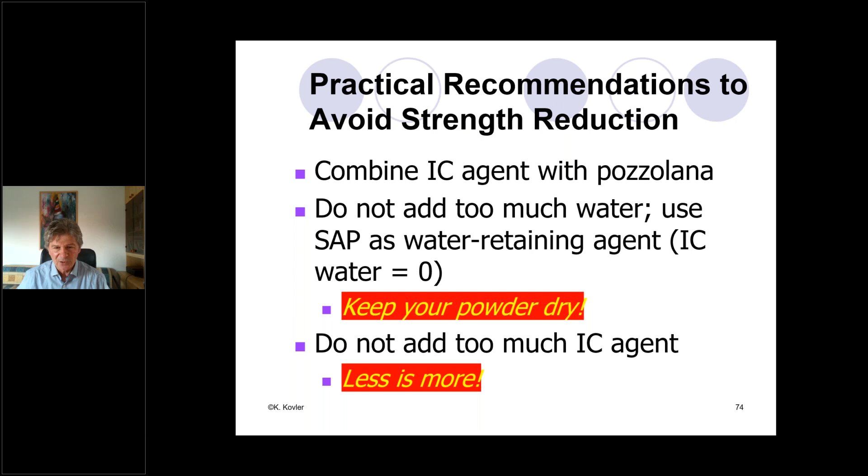And in conclusion, let's do better curing, let's do better hydration, and let's have better durability of structures.